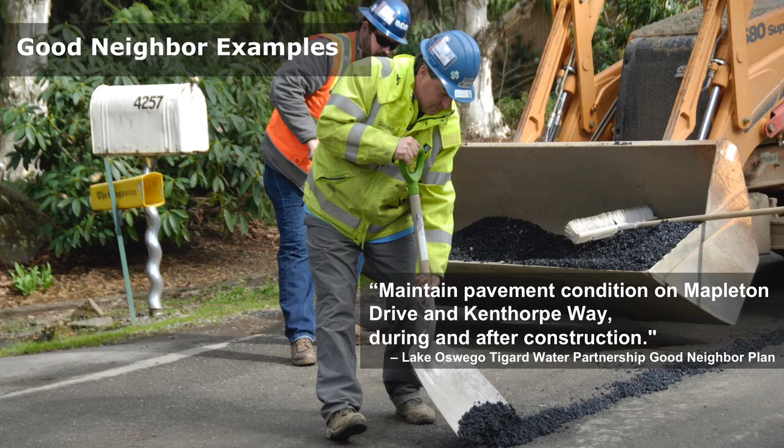Another one for the Lake Oswego Tigard water treatment plant. Maintain pavement condition on Mapleton Drive and Kenthorpe Way during and after construction. So they made that part of the construction contract, that the contractor had to keep those roads up. And heavy traffic from dump trucks and cement trucks takes its toll on roads. So they committed to make sure that those were kept up during that process.

Back to the Oak Lodge Sanitary District, they talked about the architectural design, building style, scale, materials chosen to blend with the surroundings and make a compact plant footprint. All of that can be taken into account, and we'll be talking some more tonight about a case study that shows how that was done on a treatment plant as a specific example.

And then back to Lake Oswego Tigard, where landscaping, fencing, and walkways should be designed to fit the residential setting. I realize that comment will be different for this group because we're in a more rural setting and not necessarily a residential setting. So we'd like to understand from you how it is different than what was described for the Lake Oswego project.

So at this point, the rest of the evening is covering several things. We'll be getting into the process of how you want to get to that final document. And Dan will take us through some exercises that will help us talk through that and gain an understanding of how we can do that. We will then go through some background on water treatment and how we treat the water, what the elements of it are, and what we will be taking into consideration as we put the design together. And we'll talk a little bit about how an agreement like this can impact that design. And then at the end, we have a public comment period. So at this time, I'll let Dan take it away from here.

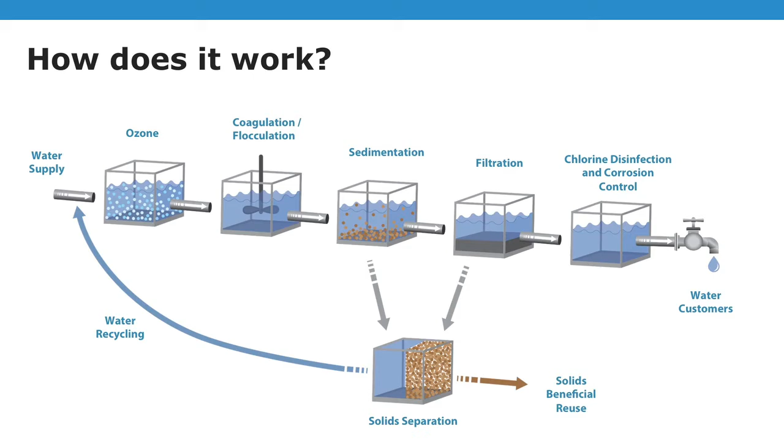And I was talking to Andrew Nishihara, a young engineer on our design team, about this today, and I said, I'm really excited to kind of share what treatment really means for these folks that don't really quite know yet. And he said, Jude, they don't want to know about all this treatment stuff. They want to know, is it smelly? Is it going to have lights? Does it make noise? Like, that's what they want to worry about. So please, please, please don't let me forget to talk about smelly, lights, and noise as we walk through these treatment processes.

Okay, ozone. Ozone is a water treatment technology that is very common. In fact, every water treatment plant that we've built here in the last decade all has ozone. And you'll see the reasons why at the end of this when we show you what the benefits are in terms of the boxes that it checks in terms of multiple barriers.

But I also want to say that as I walk through these, I want you to get a sense of what these things really look and feel like. So at the end of each one of these modules, I'm going to show a picture of the Joint Water Commission water treatment plant, which is a plant that you all will be touring. And I'll just point out which concrete boxes on that site plan represent that particular treatment technology. So you can kind of see, oh, those are the big boxes with lots of water, or they're relatively small. So you can just kind of get a sense.

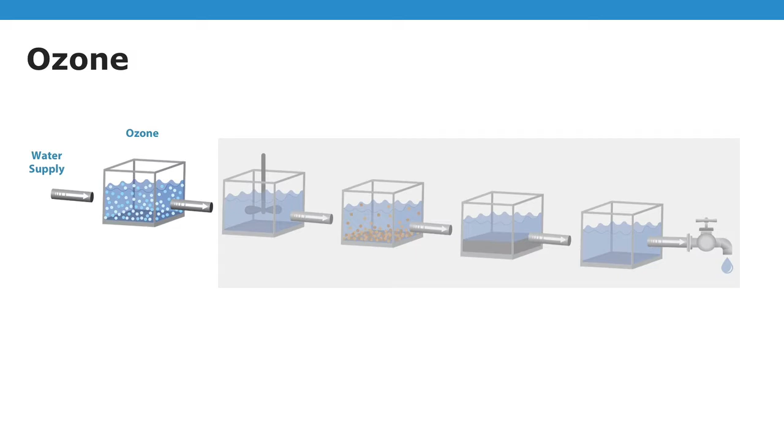But Joint Water Commission water treatment plant does not have ozone. So instead, I put this whiz-bang graph together for you to show you kind of what the major components of an ozone system are. Ozone system consists of an oxygen supply, typically liquid oxygen, a generator, an injector, and a contactor. And then to ensure we don't discharge any ozone, we quench the ozone, and any gas that goes off the top we destroy. So I'll kind of walk through these piece by piece.

Oxygen supply is typically a liquid oxygen, and these liquid oxygen storage containers are very common. If you've ever driven behind a hospital, you've seen a big tower, maybe some are vertical, some are horizontal. That's a liquid oxygen storage, and right next to it are some vaporizers that take that liquid oxygen and turn it into gaseous oxygen. We then take that gaseous oxygen and we excite it. We pass some electrons through it, and a certain fraction of that oxygen then goes from O2 to O3, which is highly reactive and can just blast the crap out of a lot of organics and other things that are in the water. That is the ozone generation system.

We then mix that gaseous ozone and oxygen stream in with the primary flow through the plant and put it into an ozone contactor, because that ozone needs time to react with the things in the water. So we give it 7 minutes for taste and odor, 15 minutes if we're trying to disinfect cryptosporidium. Different things require different contact time with ozone and different concentrations of ozone in the contactor.

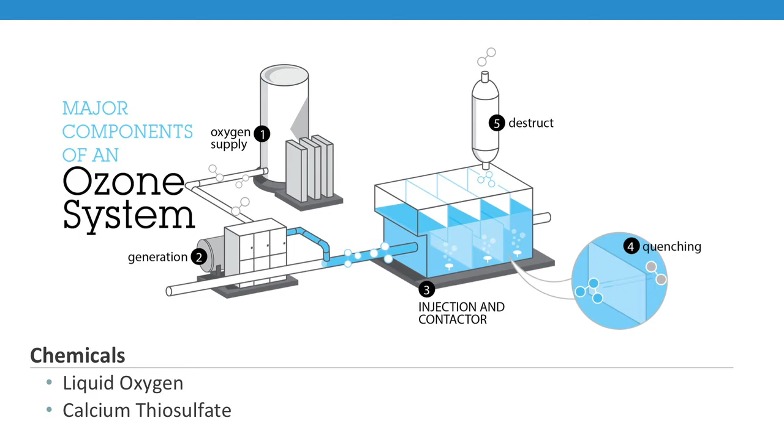And any ozone, because we're adding it as a gas, that happens to escape into the headspace of this contactor gets pulled through what we call a destruct unit. And that destruct unit has catalyst in it. It basically passively allows that ozone to react, so that what comes out the end is water with oxygen in it and oxygen off the top. And what also comes out is the destroyed organics, or the organics that have been pulled apart, including things like algal toxins, or the inactivated bacteria, the bacteria that got lysed and are no longer infectious.

Questions on ozone? Are you excited about ozone now?

Coagulation, flocculation, sedimentation. This is kind of the heart of most of the solids removal at a conventional water treatment plant. Now, I know there's a couple fishermen in the back, but I don't know if you've ever taken a glass of water. You know, when streams go a little off color, if you were to take a glass of water and put it on your shelf, that water that's unclear would literally probably stay unclear for a month.

And the reason is those particles that are in there, they're not going to settle out because those particles have a charge on the surface. Typically, we consider a negative charge. And what they're doing is acting like little magnets in that water, and they're keeping each other in suspension by kind of repelling one another. So they're stabilized in the water.

And what we try to do with coagulation is destabilize that particle. We add a little bit of coagulant, and what it does is masks all of those charges and neutralizes them so that those particles can stick together. And if we can get them to stick together, then we put them through coagulation and flocculation. And coagulation and flocculation is a process where we mix them enough to where they can interact with each other, but not so much that we accidentally and inadvertently break them apart at the end.

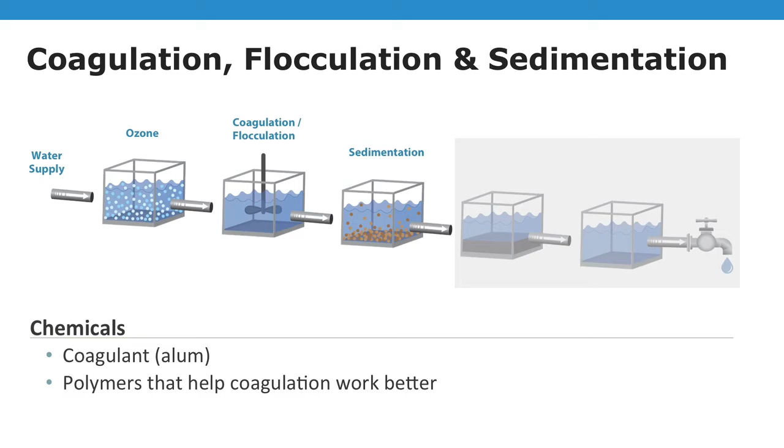The other thing at the tail end of these is what we call launders, but they're essentially big weirs, and water just kind of pours over those into the launder. So just like a stream as water kind of cascades over rocks, you'll hear that, it sounds like you're next to a little creek or something. The fall is only 6 inches or 9 inches. It's not incredibly loud, but a little bit of noise there.

Lighting. We need to do maintenance on this equipment. And in order to do maintenance at night, when things typically go wrong, if you ask plant operators, there needs to be lights there. Those lights don't need to be on all the time. But as you're going out there to do maintenance, you need to have the ability to get out there and maintain them. These days, we typically make them motion sensors. So as you walk out there, the lights go on, and the lights behind you turn off so that you minimize the light pollution.

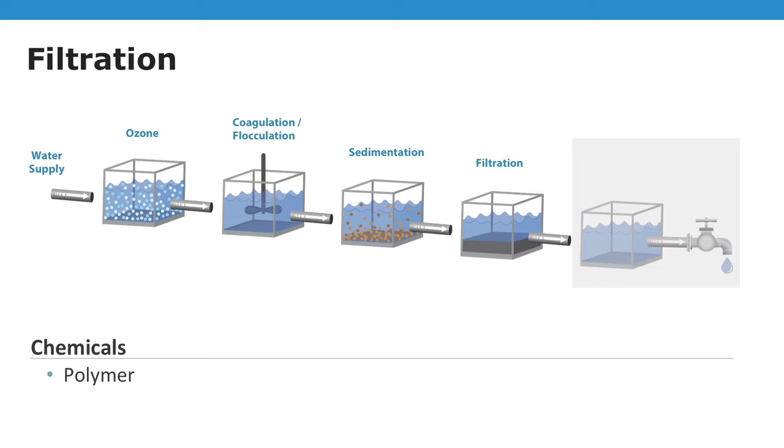Those solids that were too small to settle in the flocculation sedimentation basins. Sometimes, not all the time, we use those long chain polymers to glue those solids together to make them a little more sticky so they get removed in the filters. The filters are right here on this plant.

You can see there's quite a few of them because as the solids fill up in that filter, we start losing the filtration capacity, and we end up having to take that filter offline and we backwash it. And what I mean by backwash is instead of letting water filter through from the top to the bottom, we backwash from the bottom to the top.

We stir up all that media and scour off all of those solids, and they spill over until that water clears up, and then we bring that filter back online again, and the sand settles nicely at the bottom and the anthracite settles nicely on top of it.

So are they smelly? Nope. Are there lights? Similar to the flocculation basin, there's lights on top for maintenance and observation, but typically not on at night. And do they make noise? Well, to backwash, we have to pump the water, but typically those pumps are in buildings and certainly would be in buildings for the Bull Run water treatment plant.

Questions on filtration? The coolest part of the process? No one has any questions?

Okay. Chlorine disinfection and corrosion control is the last step. Chlorine disinfection in this case is kind of the final barrier for pathogens through the system, and typically chlorine is added just like you would get chlorine bleach. Your bleach in your house is sodium hypochlorite at about 6%. What we do typically at water treatment plants is we buy it a little more concentrated, like 12%.

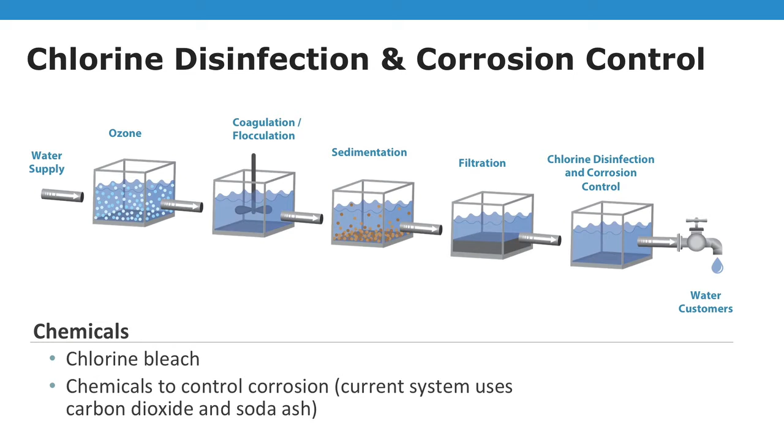Soda ash is very common. Yeah, it's sodium carbonate, essentially. You can make it by putting baking soda in your oven. You can buy it at the grocery store if you want to make your own detergents or whatnot. It's a pretty common chemical. And carbon dioxide is what trees need to breathe.

The clear wells, where all of this happens, a big water holding basin, because water flows through a plant by gravity, they're typically below grade. And you'll see at the Joint Water Commission and the Willamette River Water Treatment Plant, these are basins that are buried underground. You don't see them.

Sometimes there's a little pump station on top because they have pumps that are dangling into them to backwash the filters and other things, but it's really just the pump station that you see. Everything else is underground.

And finally, solids, everybody's favorite topic. Oh yeah, does the clear well smell? Are there lights? Does it make any noise? The answer is no. The only potential noise is from the pumps. And again, we can attenuate. And you'll see that like at the Willamette River Water Treatment Plant in Wilsonville.

You'll see kind of the sound attenuation on the walls there. In fact, you can stand in there and hear all the sound and walk outside in the park and you don't hear anything. So we do have acoustical engineers that can help us mitigate those sounds. Yes, sir? Do you have fan motors or fans that make noise outside? That will always be there?

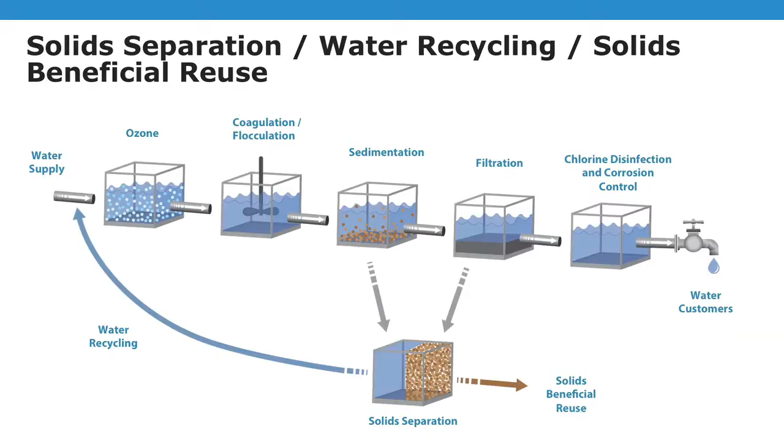There are HVAC and air handling units and whatnot. Historically we'd put them on top of buildings and they would squeak and make lots of noise. They're also harder to maintain up there. So these days we try to put them inside buildings so that we don't create those kinds of noises.

Well, I read an article where, if they have a series of fans, they run them at different pitches or angles, and then it reduces the resonance of it, and so it reduces, I guess you'd say, the noise volume of the facility. Is there any truth to that?

Boy, there are acoustical engineers that do just that, and they put in dampeners where the inlets come in, to ensure that no noise escapes there. I'm a water nerd, so I can't really comment on that, but it sounds like a clever idea.

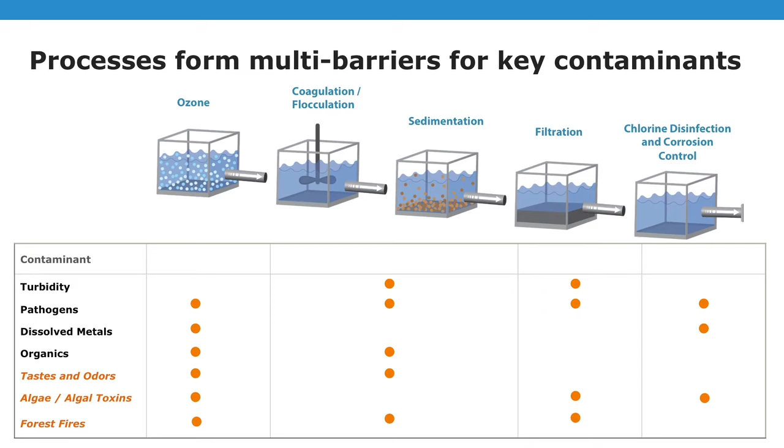Solids, we already talked about the lagoons out here. And finally, these are kind of the multiple barriers. So here are all of the treatment processes we talked about, and here's the boxes that they check. If you look across the boxes, you'll see that our goal is to create at least 2 of those red dots, which shows that they're effective, at least 2 in each one. So again, creating a multiple barrier approach for water treatment. Okay, moving on. Yes, sir.

We understand that you're concerned somewhat, I guess, about chemical spills, that there'll be a hazmat group on site. And then we heard something about chlorine gas. How does the chlorine gas evolve in this process, and potentially into the atmosphere, that you need a hazmat group? Yep. So please.

As part of our current treatment, we use chlorine gas at Headworks in the Bull Run. But as part of the new filtration facility, we're looking to go to sodium hypochlorite, which is the liquid. We heard your safety concerns. We knew this was something that folks who lived in the neighborhood were worried about, and we were worried about it too. So even though lots of big plants use chlorine gas safely and effectively, and we've used it safely and effectively for years, we made a decision to move to sodium hypochlorite.

That's a liquid chemical, so we could contain it on-site with, and Jude can speak to this certainly, standard secondary containment. You just build containment right there inside the chemical building to contain any spills, and since it's liquid, you don't have to worry about it getting into the environment. So you wouldn't necessarily need a hazmat team standing by. Certainly we would call folks in if some sort of issue occurred, but you design and build your plant thinking about the worst thing happening, right? This whole tank of sodium hypochlorite spilling, and how do we contain that?

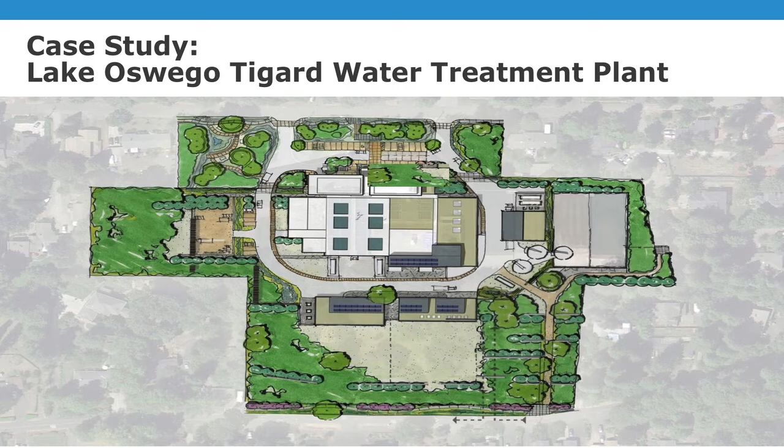The original plant was built way back when in a field, and this neighborhood kind of built up around it. When it came time to expand the plant, there were neighbors very close to it, so working with those neighbors was important. Now, I mentioned that these folks got engaged much later. There was an early preliminary site plan that had been put together by engineers, and it was the perfect engineered water treatment plant design. But what unfortunately hadn't been considered were the inputs of all the neighbors that were going to be close to these things.

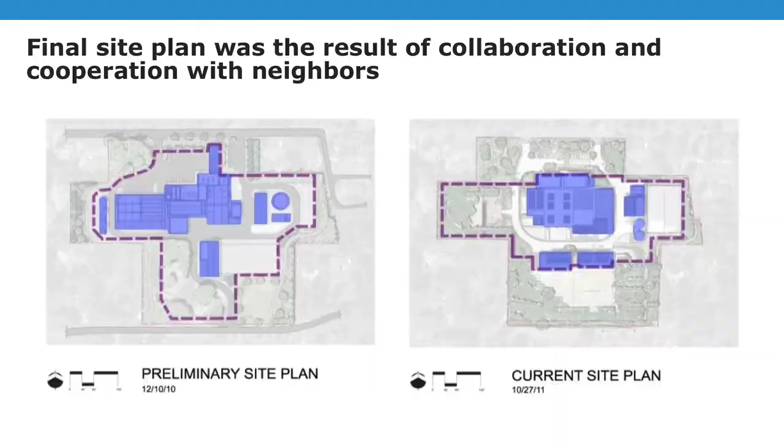So we worked, there are some dates down here, over the course of a year to modify this water treatment plant layout into something that the neighbors could accommodate. I'm just going to walk quickly through what some of those issues were. We designed it to protect, I'm going to step back here so I can read some of these things, to protect neighborhood safety. Some examples are separation of the work sector, where people are actually doing the work in the water treatment plant, from the neighbors. So there was a barrier that separated the plant from the surrounding areas.

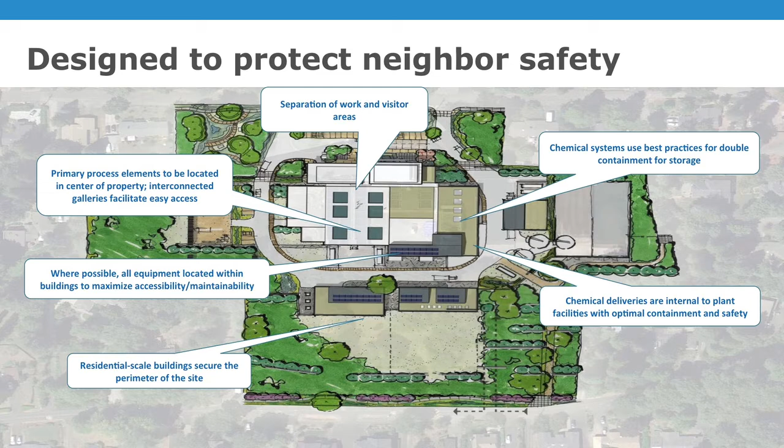Pulling all those processes into the heart of the plant and maximizing the setbacks from the neighbors. Someone asked about equipment. Where possible, we tried to put all equipment inside buildings, nothing on roofs and things like that. We tried to make the buildings look residential scale. This is in a residential neighborhood, so buildings were small and felt like residential facilities. All the chemicals were delivered close to the heart of the plant and all together, and the chemical systems use the best containment, double storage and these types of things.

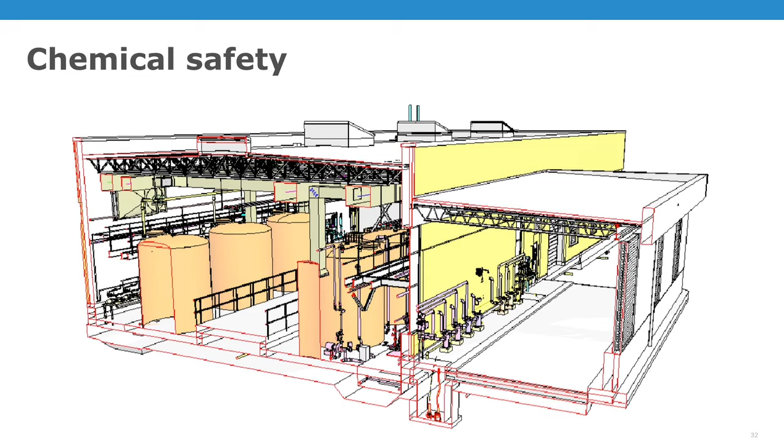This slide shows an early interactive model that we worked with folks on in order to move things around and make sure that operators could maintain the parts and pieces. What this shows is basically the acids on one side of the basin all contained together and the bases on the other, so we avoid contamination and chemical reaction. Even the chemical delivery area was separated between acids and bases, and any spills or drips that occurred in there were contained and could be dealt with in chemical sumps.

Yes, sir? How high is that structure? That structure is about 28 feet tall. That's it. I'm getting old, so my memory may be a little dusty, but I think that's about right.

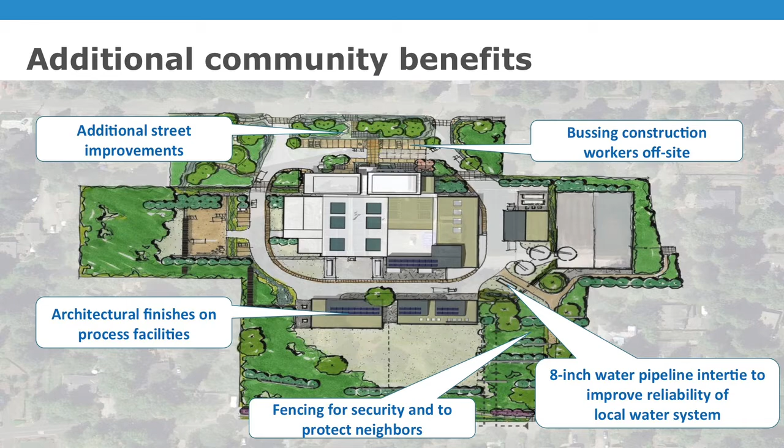Additional community benefits were collaborated on and baked into this design. Some street improvements for the neighbors. Architectural finishes, again, that made it look residential. Fencing to add security and protect the neighbors. An intertie with the residents, so if and when they had a water outage, they could get water from this plant. And during construction, we bussed in all the construction workers to minimize traffic, because we just didn't have room for folks to park on this site.

So what can we expect to see at our tours? We heard you're interested in seeing things like pump stations and noise, so we'll get to see that firsthand. Chemical safety features, the actual heart of the water treatment facilities, and some of the amenities that were built into these plants.

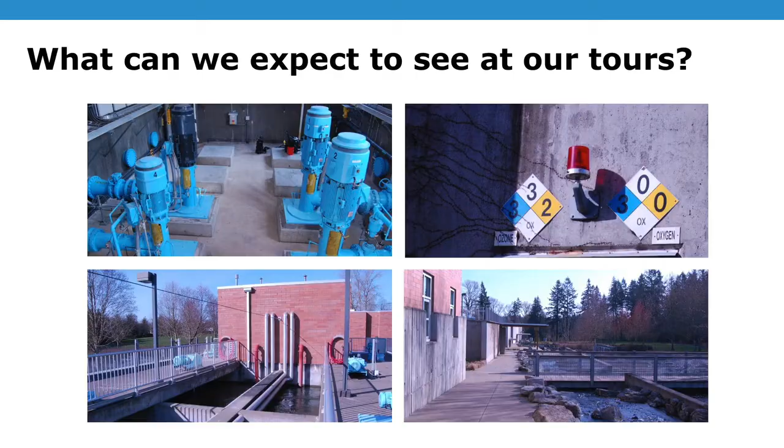Now, I've heard you guys are tired of seeing the pretty outside of these plants. This is the Willamette River Water Treatment Plant in Wilsonville, so I wanted to give you a little peek over the fence into the water treatment plant. You'll be touring this plant in November. Again, there's a nice water feature to bring the neighbors in. They had interpretive displays that describe each of the processes. This plant is kind of the crown jewel of Wilsonville's infrastructure, so they wanted to show it off, and it has been a great plant.

And finally, the tour of the Joint Water Commission water treatment plant, currently thought to be scheduled for February 2020. So, if there's time, if you had any comments about what you'd like to see, what you'd like to hear more about as part of these tours, we'll make sure and get that information and make it available for you, in addition to the questions I already answered that I wasn't able to provide numbers for today.

What's the decibel limit during the day in construction? Oh, of construction? I just don't know off the top of my head, but it can be prescribed, and typically that prescription comes as part of the permit process. And it varies, of course, between noisy city construction and rural construction. So.